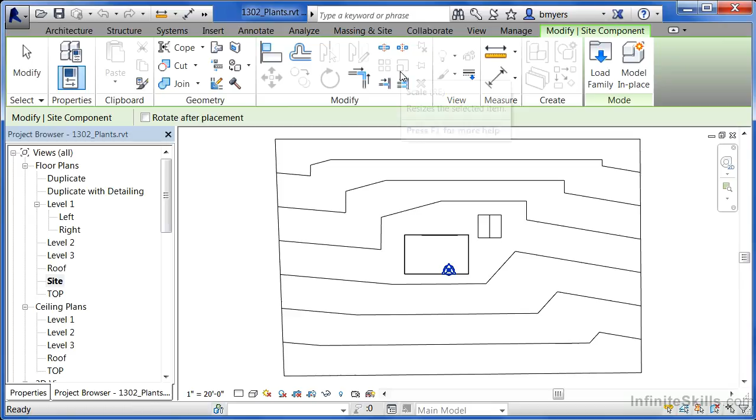One of the things we may wish to enter on a site plan is trees and plants somewhere on the site. To do that, underneath the Massing and Site tab, there's an option for Site Components. Select Site Component, look under Properties, and you'll see a variety of different types of shrubs, plants, and trees that we can place inside our Revit project.

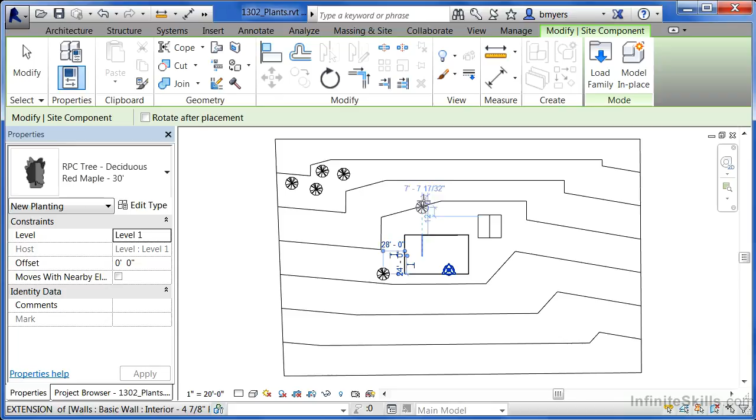I'm going to look here on the list and select red maple toward the bottom, and pick a few spots where I want to have some red maple trees. I'll put one over here close to my building so we can see it easily, and a few more over here, so maybe it's kind of a nice little wooded area.

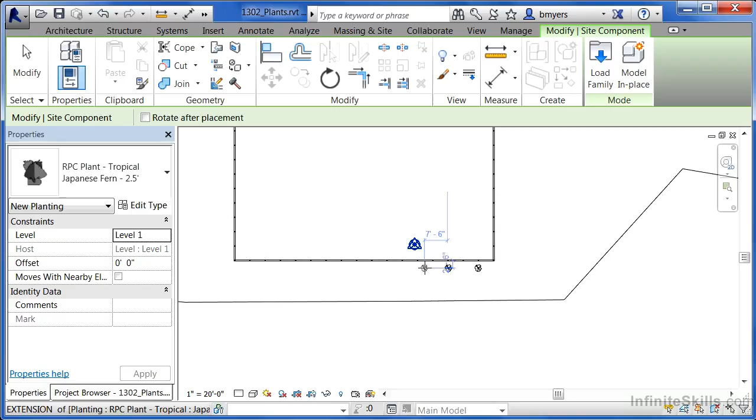Let's put a few plants or shrubs next to the building. Just go through here and pick ones you might like to place. I'm going to pick this tiny little Japanese fern, and you can see how the scale is different depending on the plant that you place. I'll put just a few more in here on the site.

Also, put a few shrubs in, and place a few of those in these locations. One of the things you can see is depending on the type of plant, it'll have a different symbol. The interesting thing is that when it comes time to render these plants, they will all render as the type of plant that they actually are.

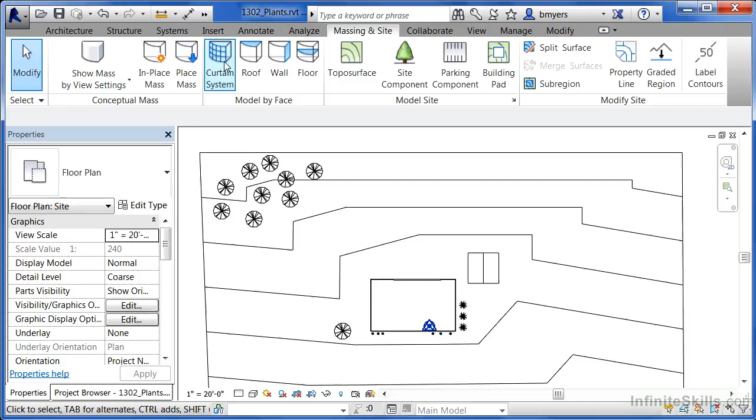Now let's take a look at this inside a 3D view. We can either come up to 3D, or use a camera currently outside our building that should let us see what this looks like. Double-click on 3D View 1. Here we can see the different plantings outside our building — the little bushes, the big tree here in the background.

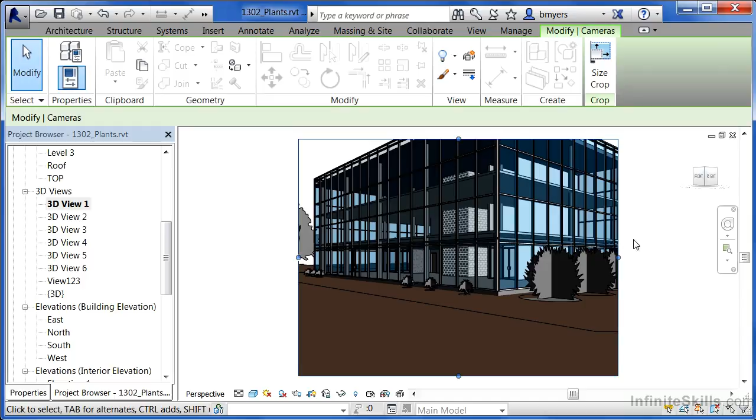If we want to expand this view out, we can select the box going around the outside of the view, click the control button, and pull it out slightly. Same way here — pull it out slightly to see what our building looks like with these bushes and trees.

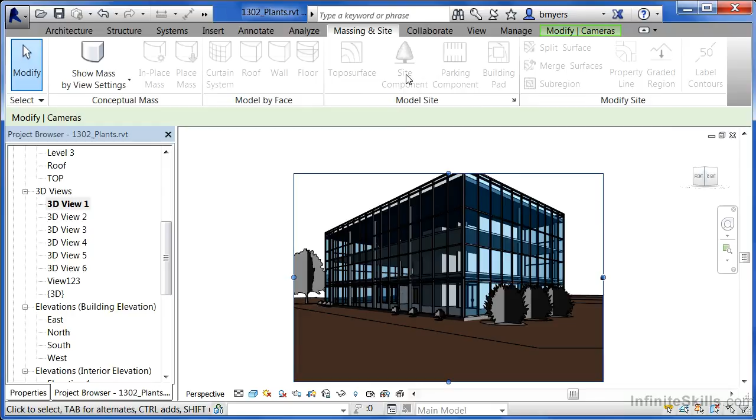Now, the most interesting thing about these objects is that they're not hosted directly to a level — they're actually hosted to the site. So if the site slopes down, each of the trees and bushes will come in at the appropriate height to sit at the site at that elevation. So, to place trees and bushes around the outside of your building, simply go to Massing and Site, choose your site components, and place them anywhere you need them around your building.